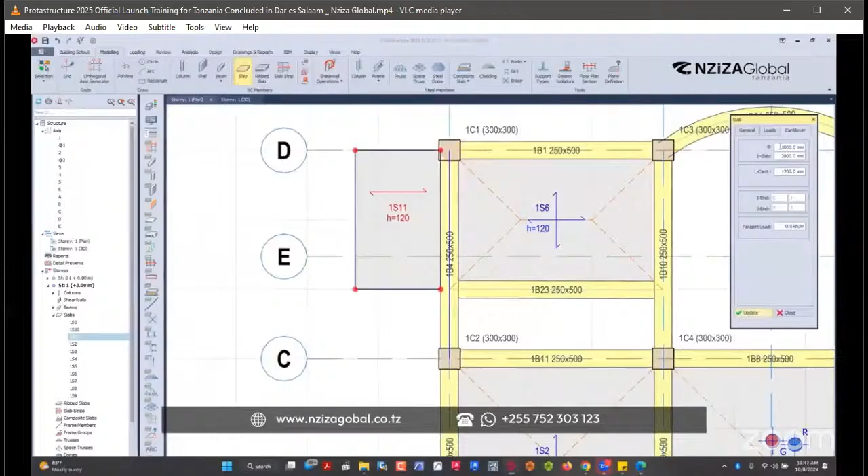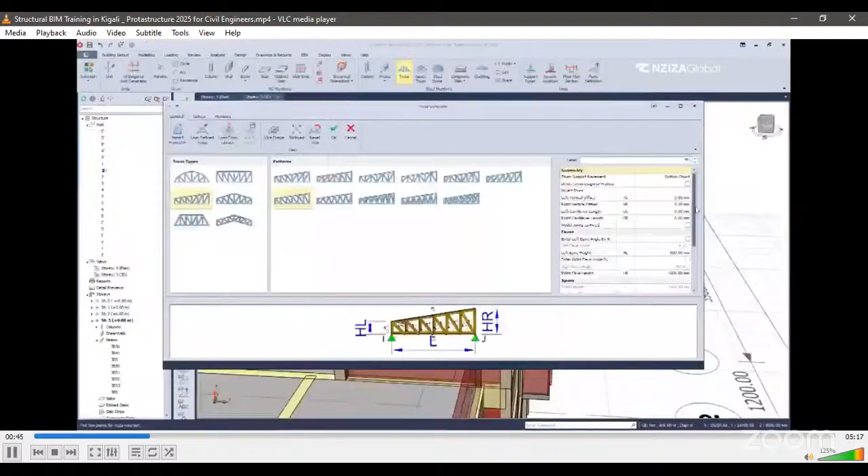Before, we were using manual skills for designing and also other softwares like Prokon, but this one, ProtaStructure, is a very interesting software for structure modeling analysis. It is quick regarding the design of structures, for concrete structures, steel structures. It is very quick. It is detailing everything and it can be used by most of the engineers.

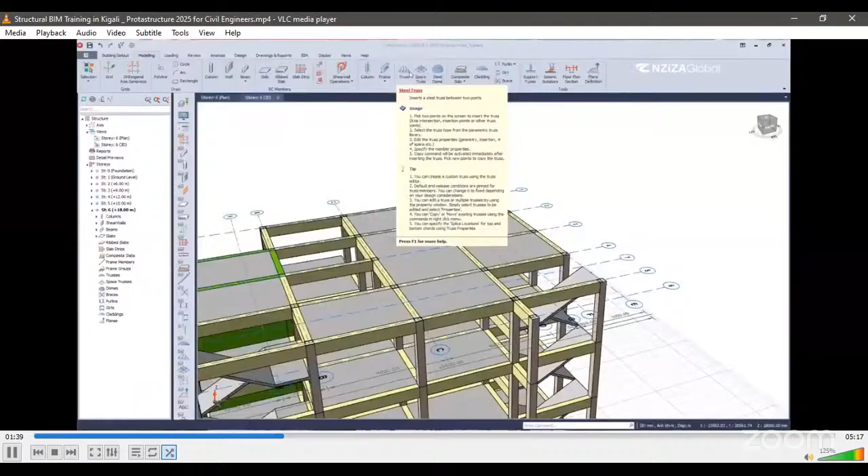I work in a public institution called Rwanda Agriculture and Animal Resources Development Board in its single project implementation unit, SPIU. I was one of the civil engineers attending the training on ProtaStructure software, and I found it very fruitful, especially for civil engineers, where we learn more on the design of building structures,

and also this is a good training center, and we recommend to expand this training for both the public and the private engineers to improve the capacity on using softwares, as these softwares help to perform our work rapidly in safe design.

I have attended the training of ProtaStructure 2025. The training was very, very interesting because by attending the training, I was able to conduct model analysis and model detailing in ProtaStructure 2025. I was able to conduct the exercise of modeling, loading, and structure analysis, even detailing, by using both Prota details and AutoCAD.

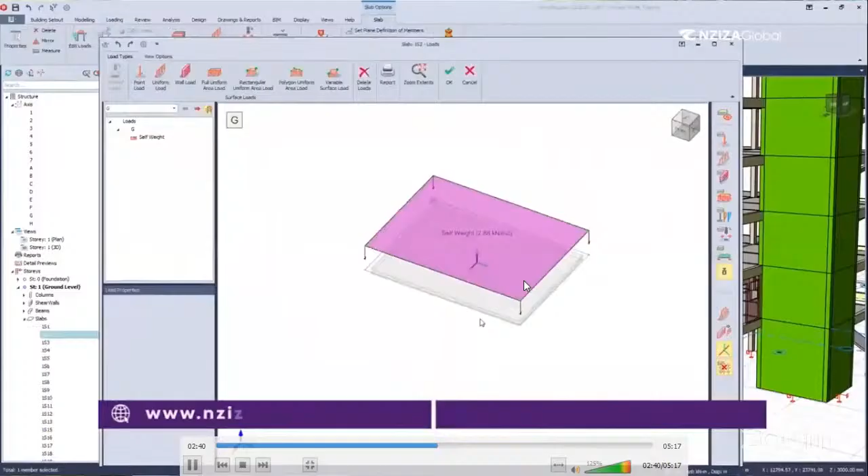After this training, I will be able now to use the software and even cross-check the report provided by the external consultant and validate it in a short time, and also cross-check what has been done. So the recommendation to my institution or the other agencies or other companies, I can encourage them to

I'm a quantity surveyor from Suma JKT Construction Company. Nziza Global enhanced the training and it was so useful. We got the necessary tools to use PlanSwift software. It's a good software to build bills of quantities.

I work for the Road Development Agency, which is a road authority in charge of planning, design and maintenance of the road network in our country, Zambia. I'd like to thank Nziza Global for inviting our agency, and I'm honored to have been nominated by our agency to come and participate in this important training.

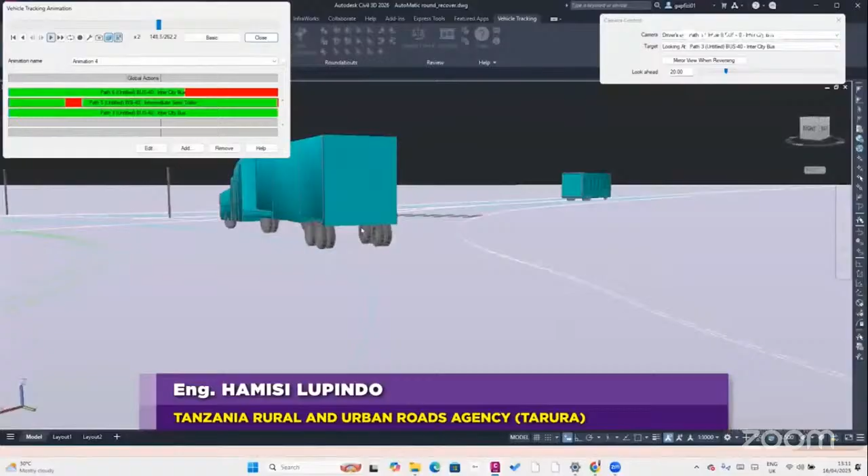I work from TARURA, Tanzania Rural and Urban Roads Agency. It deals with planning, managing and construction of different roads in Tanzania, rural and urban sections. This is my second time to attend a training from Nziza Global. I would like to thank Nziza Global for facilitation of this course, where our facilitator has equipped us with knowledge about road design, advanced design of roundabouts, and vehicle tracking, which will assist us in our daily activities.

I'm a quantity surveyor from Suma JKT Construction Company. Nziza Global enhanced the training and it was so useful. We got the necessary tools to use PlanSwift software. It's a good software to build bills of quantities.

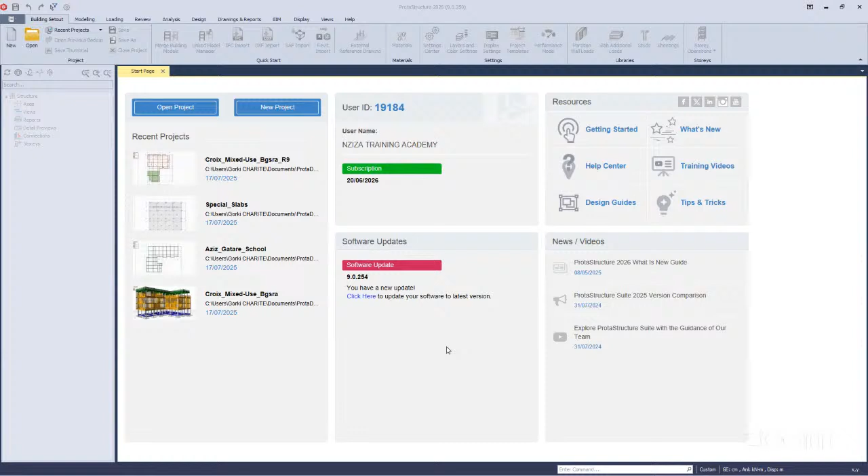So from the information I got from the form you filled when registering for the webinar, I saw that most of you are familiar with ProtaStructure and just a few of you are beginners to the software. So during this webinar, I will try to demonstrate some of the features of the software, but our main focus will remain on the design of ribbed and waffle slabs. So without taking much time, let's start the demonstration.

So this is the starting page of the software. You already know the starting page. What I will do, I will create a new project. You can create a new project or open an existing one. Give it a name, let's say training webinar, for instance. And then here you have to choose the standard that you want to use. Let's use the British standard. Then click on OK. So the software will load a bit and open a new project. Good. So this is our new project created.

In ProtaStructure, you know, we have a very user-friendly interface here at the top. You can go to the building setout for certain settings. You can go to the modeling to create different building elements like columns, beams, and whatever.

And if you check well, in this latest version, we have a newly introduced tool, the staircase. As you know, in the previous version, we used the plane definition to create those kinds of elements. But here in the new version, we have introduced the staircase tool, which is very, very good. When it comes to steel, we have also introduced the base plate tools here. Now you can create the base plate in ProtaStructure without going to ProtaSteel. All these are new features of the new version.

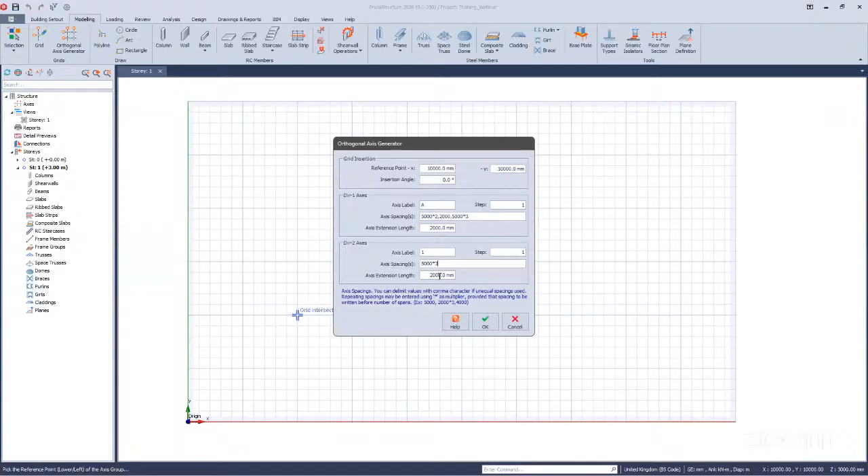So let me start by creating some grids. As you know, before starting modeling, you have to create grids. What I'm doing, I'm filling the spacing between grids. So we have two directions: direction 1, which is X, and direction 2, which is always the Y-axis. So these are just spacings between grids that I'm filling here on direction 1 and on direction 2 as well. If I click on OK, automatically I will have a grid system. This is the quickest way instead of drawing grids one by one manually.

Okay, so let's try to create some columns. I will use the column command. If you click on column, we have a property where you have to feed all the information of the columns. You have to check the section of the column, of course, and after this, you have to start placing columns. So just click on the intersection. The column will be created.

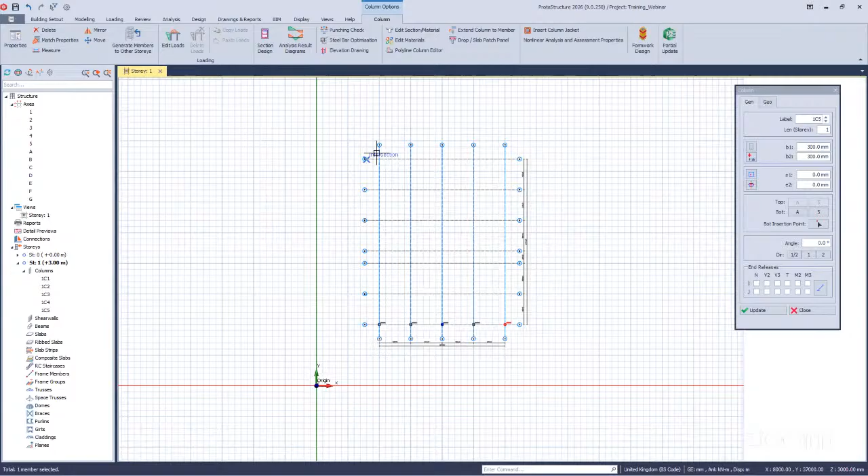So to facilitate the work, if I just drag and drop, all columns will be placed. So if I click and drag, the columns will be filled. This is the easiest way of placing columns instead of placing them one by one. So you see, in a few seconds, I have modeled the columns. You can play with the eccentricity if you want. You can change the bottom side if you want to create a slant column. You can change the angle and so on.

So let's also put beams. I will go to the beam command. I will click on beam. Just fill the section of your beams as you wish. Put the width, put the height. If you want to use the eccentricity, you can. You see you have eccentricity as well. You can create a curved beam in ProtaStructure and so on. Most of you, I saw, are already familiar with this, so I will not spend much time here.

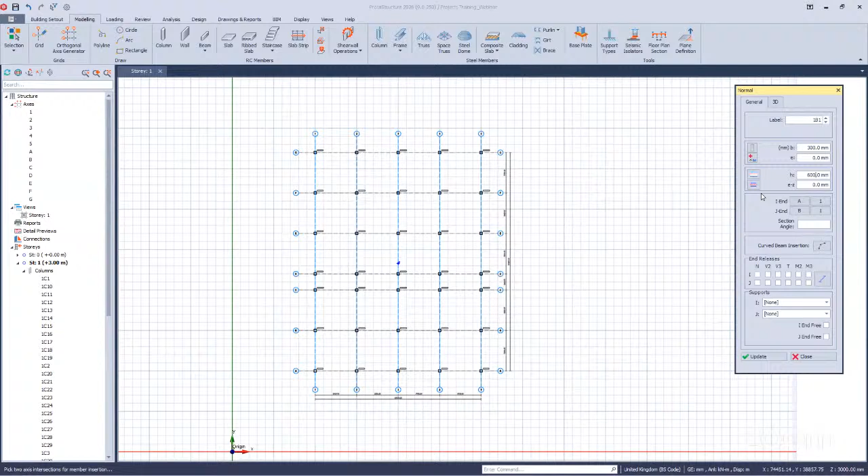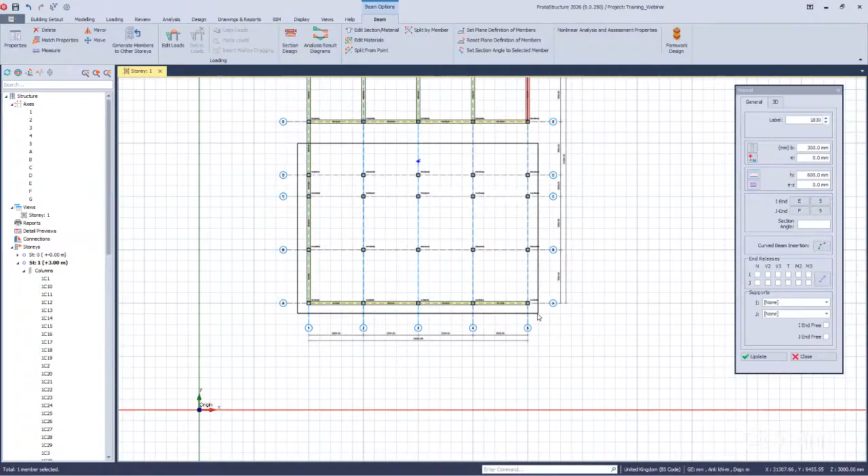Again, to place a beam, just click the starting point and the end point, then the beam will be created. You can continue placing your beams like this, or you can just click the starting point, click the last point here, and the software will automatically know that we have some columns in the middle and create different spans of a continuous beam. Like we did with the columns, you can just drag and drop like this, and now all your beams will be created as simple as that.

So very simple, very quick to model in ProtaStructure. So far, we can view what we have done in a 3D view. So if I go to the view here, I can now move to the 3D physical model to see what I have modeled so far. So you can see our first story has been modeled with columns and beams in just a few minutes.

Okay. So there are still options to make some changes to what you have modeled. For instance, if I want to put a slant beam, we can always open the properties, go to the 3D view here, and change this delta Z. Click on update. You see how I have created a slant beam, if I can say. Okay, you already know all these features, so I will not spend much on this.

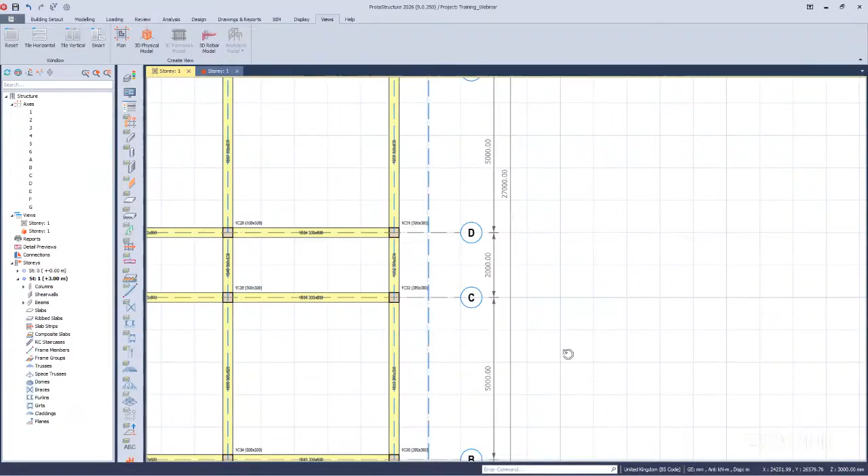Coming back to our floor plan. If you want, for instance, to create a slant column, let me offset this axis, let's say here. Let me open the 3D view for you to see the effect. For instance, if I'm working on this column, I can change the bottom side here. I click on update. Now I will have a slant column like this. Okay, so that's how ProtaStructure is very easy to use when it comes to modeling.

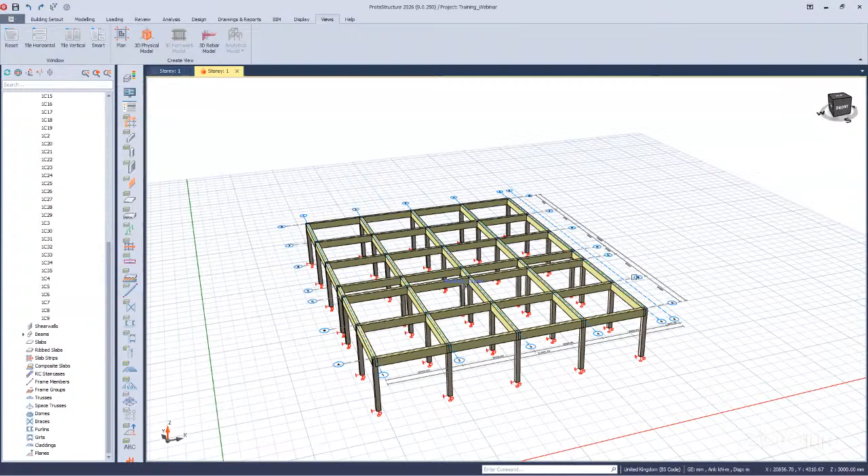So let's try to create the slabs. That's where we are mostly focusing. Let's start with the rib slab. I'm going to create a rib slab on this story. So for you to view it very well, I will go back to the plan view. So I will go back to the modeling tab. Remember, I want to model the rib slab. Let me tile my view so that you can see what I'm doing even in a 3D view like this.

So you are already familiar with the solid slab. If you want to create a solid slab, it's a matter of clicking on the command. You first have to create the load combinations. Then you have this pop-up. So if I close it and click again on the slab command, you can fill in the size of the slab and whatever, and just by clicking, you will have a normal solid slab. This is a solid slab that we are used to. But we are not much concerned with this solid slab, so I will delete it. It was just a way of reminding you how things are done. Today, we are much more interested in the rib slab as well as the waffle slab.

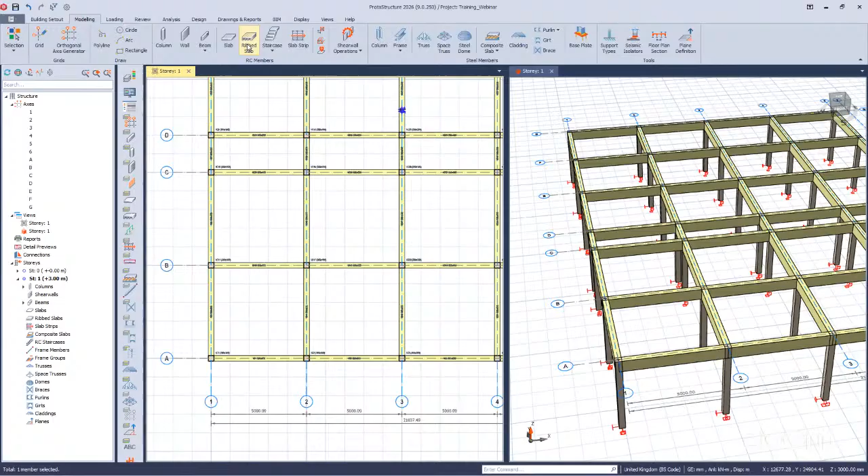So as you know, the rib slab is located here under the modeling tab, all the way to the reinforced concrete members here. We have the rib slab. So I'm going to select the rib slab. As usual, you will have this dialog box for the rib slab. So as you know, rib slabs are composed of small parallel beams, what we call ribs. So for instance, if you create a rib slab here, it will be composed of small parallel beams or ribs, with a small topping slab at the top. So let's see how you can do that.

After activating the rib slab here, you see under the type we have 3 different types. We have the standard one, which will be used to create a rib slab, like we are going to do in a few minutes. Then the prefabricated slab, when you are dealing with prefabricated slabs; we are not covering this in this webinar. And we'll be using grid edge when you want to model the waffle slab. So you already know the difference between the rib slab and the waffle slab. The rib slab has those parallel beams, but the waffle slab, which is named grid edge in ProtaStructure, has cross beams. So we have beams in both directions, X and Y, while in the standard one, the rib slab, we have beams in only one direction.

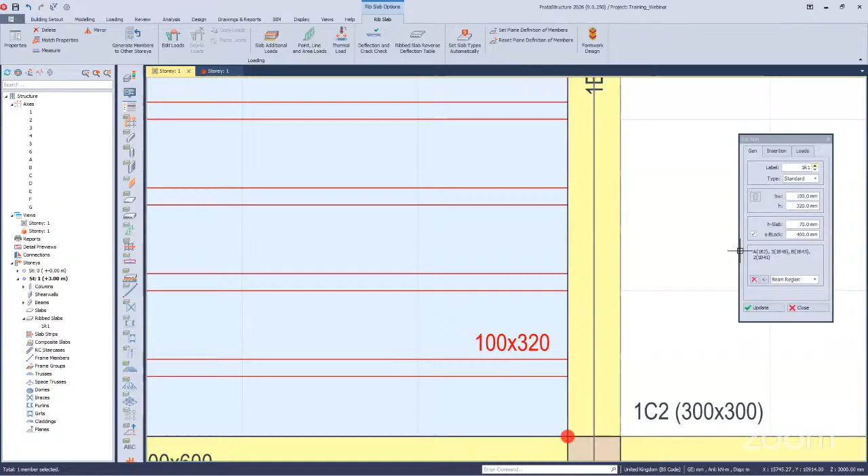Okay. So now I have a rib slab. A rib slab means we have different ribs here, or beams, these small beams, which have the size that we filled in. The BW was 100 here. The H, the height or the depth, was 320. And the top, the surfacing concrete covering all the beams here, will have around 70 millimeters.

So the 400 that we filled in here is the spacing between these beams, okay? For instance, if I increase it, let's put 600 and click on update, you see now how this distance has increased. If I go back and put 400, update, you see how they have been reduced. So that's how you can place a rib slab.

However, remember, between these small beams, most of the time we have those hollow blocks that are filled in between here on the construction site. You already know how these are constructed. So in ProtaStructure, we have this option, S block. We have this tick here. If you uncheck this, you will have hollows in between. But if you check this one, you will have blocks filling this spacing here.

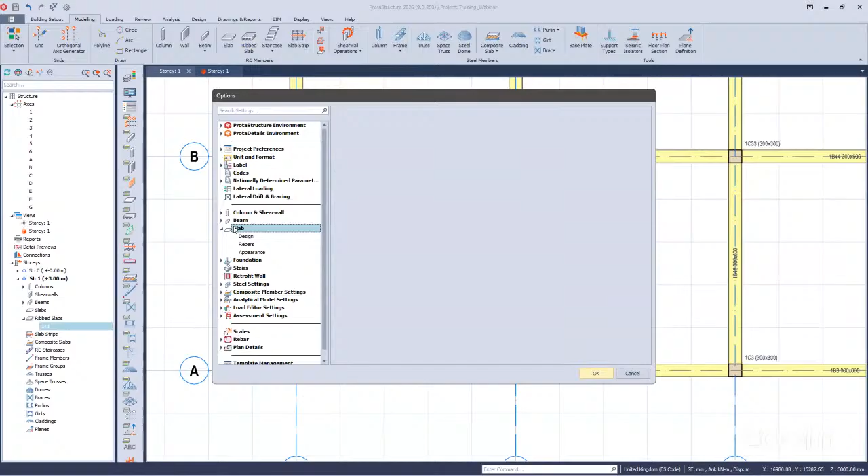And you can ask yourself, where does the unit weight of these blocks come from? If I go to the settings, all the way to the slab, let me check. Under design, you see the ribbed slab fill block. We have the unit weight here. This is the unit weight the software is using. Depending on the blocks used on the construction site, it's a matter of just changing this unit weight, and the software will calculate the self-weight automatically for you.

As simple as that. So in addition to the self-weight, you can add the additional dead load here. You can add the imposed load, snow load, and other loads that you may wish. Okay.

Then I will close this. So that's how, simply, you can model your ribbed slab. So if you want to put the ribbed slab in all the remaining panels, you have two options. You can just select the property of this first modeled slab, and you can continue placing ribs one by one.

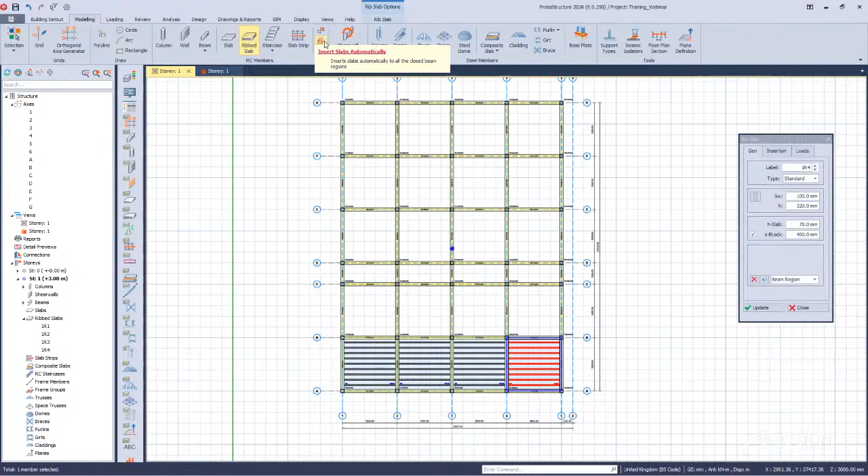But remember, in ProtaStructure, we always have an easier way of doing things. So instead of clicking on each and every panel, I can make sure that I have all the settings as I wish here. And if you go to modeling, under reinforced concrete members, we have insert slab automatically. For those who have taken the level 1 training with Nziza, you already know these tools. So just by clicking on this, all the panels will be filled with your ribbed slab.

If I go to the 3D view, now I have something like this. Good, so that was it about the ribbed slab. Let's go on and try to model also the waffle slab for you to see. I'm going to create another floor, another story. So we'll be having the waffle slab on the top story.

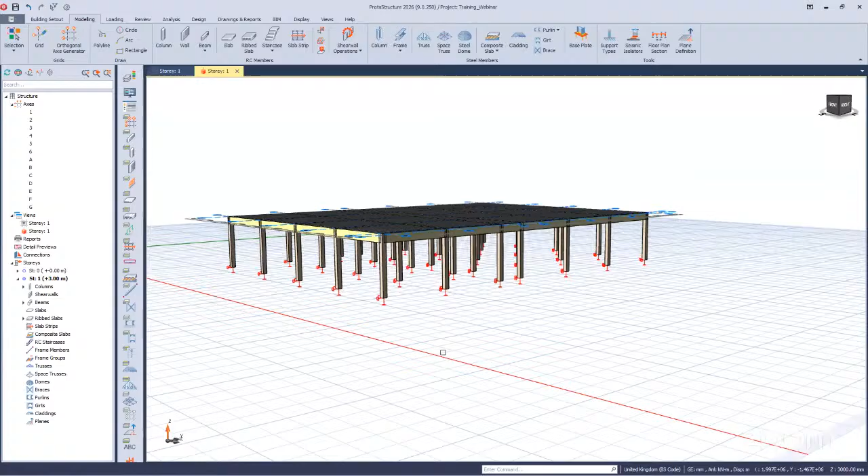So you already know how to create or insert a story. You have a couple of ways. It's up to you to use the one which is easier for you. You can go under the structure tree. If you click on story, right click, you have insert story. If you go to the building set out here, under the story operations, you also have an insert story. So it's up to you. I'm going to, let's say, 3. Now I will have 3 different stories. You can view it here. This is story 3, story 2, and now I have story 1.

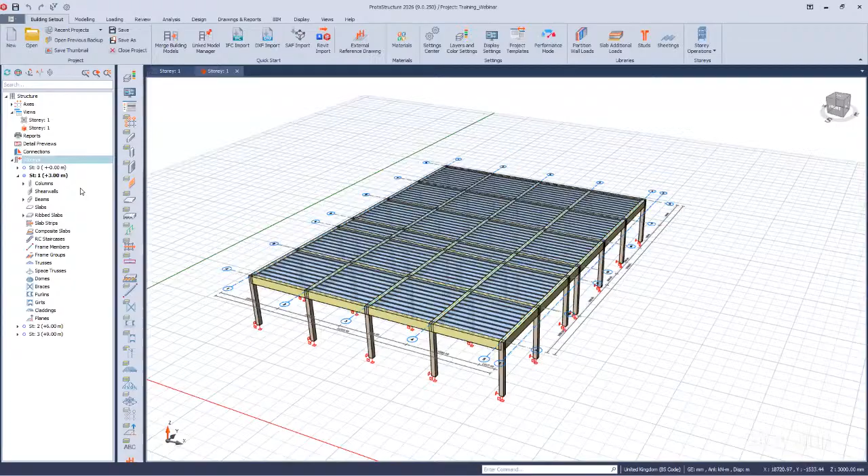So I'm going to move on my plan view. Or let me do it in a 3D view here so that you can see it. Instead of going to story 2 and creating everything from scratch, I'm going to copy paste the members from story 1 to story 2. So how will I do that? You already know the command. I will use generate story. I want to copy from story 1 all the way to story 2.

So which elements do you want to copy? I want to copy only columns and beams, because I don't want to copy the slab, because we want to create the waffle slab, not the ribbed slab, on this story. So I will click on OK. Just wait a few seconds until you see the process completed. Now you have another story populated as such. Now let me go back to the plan view and make sure I have activated story 2, where we don't have slab yet. And in this story, we are going to create the waffle slab.

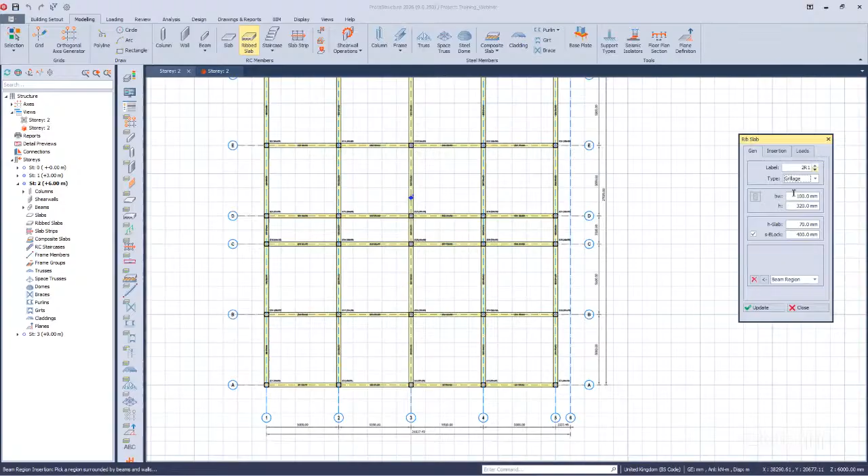So go back to the modeling. Under the ribbed slab, you remember the command. Then under the type, you remember the standard was the ribbed slab. Now we want to create the waffle slab, which is the grid one. So we shift to grillage. Now again, I will have to fill the information here as we did for the ribbed slab. After filling this information, I can come here and click once, and now I have the waffle slab. If you check well, now I have beams in both directions, in X direction and in Y direction. So that's the difference between the waffle slab and the ribbed slab.

If I go back to the ribbed slab, I had only beams in one direction. So it means when you are analyzing and designing the ribbed slab, it is taken as a one-way slab. However, if you go to where we modeled the waffle slab, we have these ribs in both directions, X and Y. So this kind of slab will be analyzed as a two-way slab.

So again, you can open the property and try to play with these parameters. If I increase the spacing and click on update, now you see the spacing has been increased. The insertion is the same as we did for the ribbed slab. The loads also are similar. Again, you can place one by one by clicking on each and every panel, or you can opt to use the automated way by going to modeling and activating insert slab automatically. Then all the panels will be filled with your waffle slab.

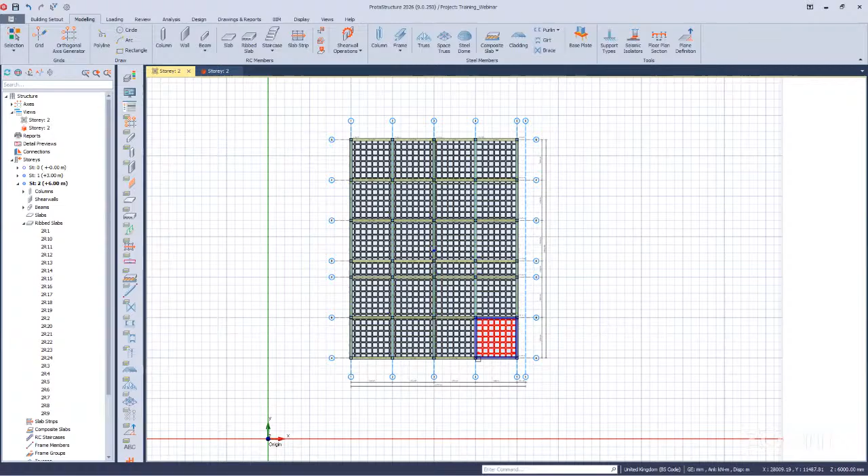And if you check well, you will see that ProtaStructure is kind of intelligent enough to try to align those rib beams, so that they may be well aligned. So if I go back to the 3D view, that's what we have done so far. We have modeled our rib slab, we have modeled our waffle slab. So now we can go on and see how we can do the analysis and design of this slab.

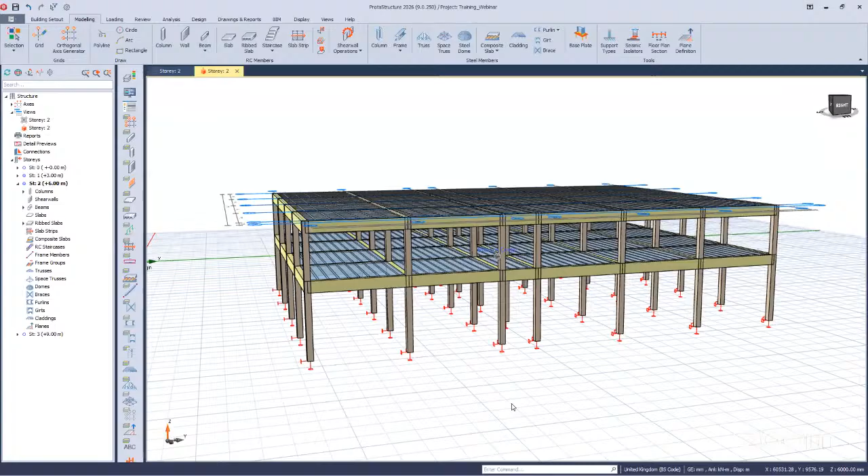But for your information, you already know that ProtaStructure can also design a flat slab. It is another kind of slab. So actually, Prota can design all those four kinds of slab. It can do the solid slab, the waffle slab, rib slab, as well as the flat slab. So even though we will not go into the design of the flat slab, let's see how we can just model the flat slab as well.

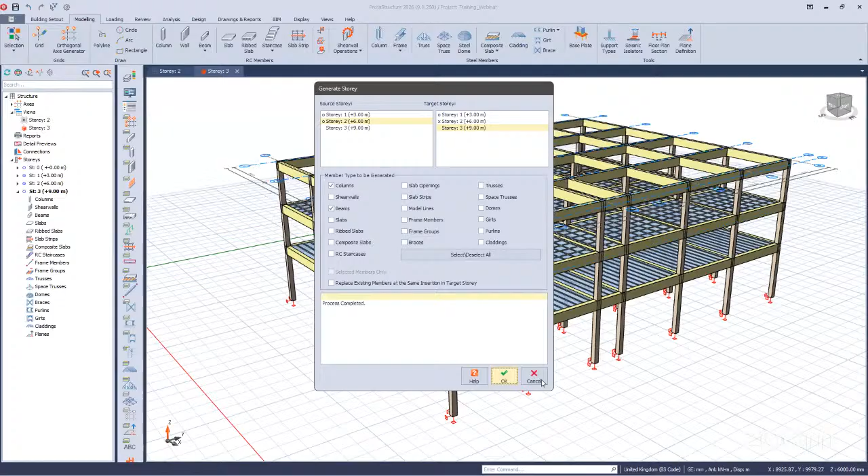So in this scenario, I will go and generate the story again. This time I will go to story 3. I will copy the column and beam only, so that we have something like this. So if I go back to the plan view, by the way, you already know that it is not necessary to always model in plan view. You can also do it in a 3D view here. So it is also feasible.

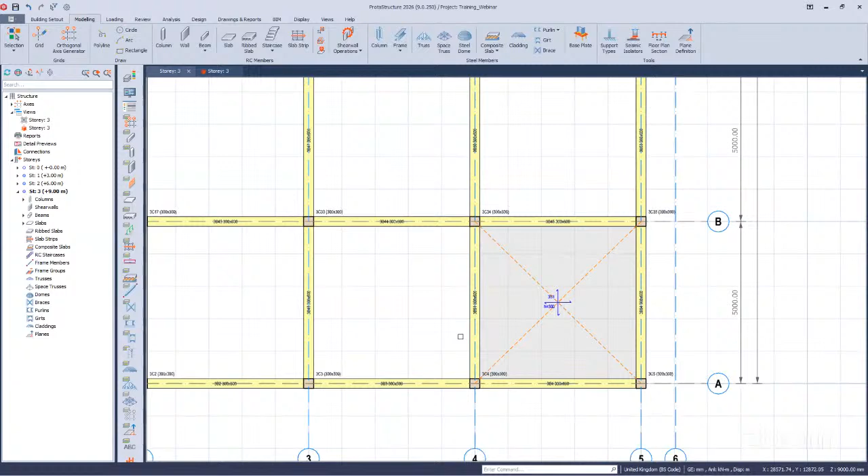For instance, if I want to create a slab, you can just click here. You can see the slab has been modeled just in a 3D view. So if I go to the plan view on story 3, you see the slab is there. So it's up to you. You can model in 3D view or in plan view. So I'm going to fill all these panels with slabs here.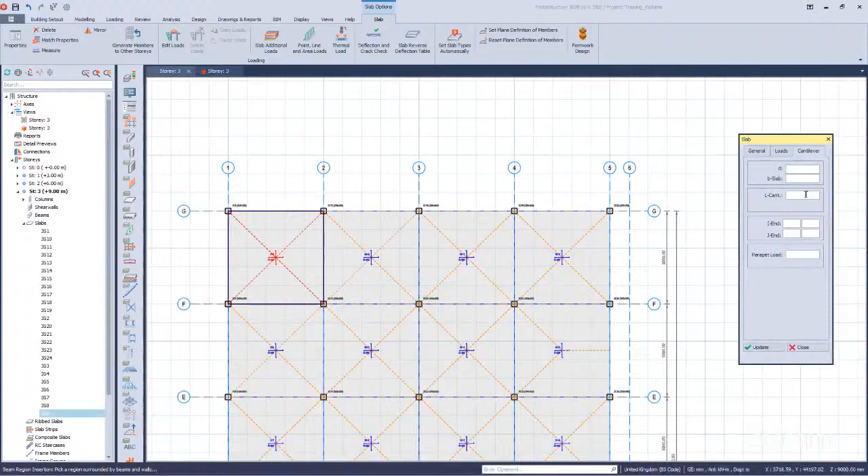I can even add a kind of cantilever slab here to cover this column if I wish to. If I go back here, I can use type 12. Type 12 is the one used for cantilevers. And if I go to cantilevers, I can fill in the length of the cantilever, like so. Now I have a cantilever here. I can do this all the way around the surrounding of my building. And take a look here: ProtaStructure has automatically joined both cantilevers. If I select here, automatically they are joined.

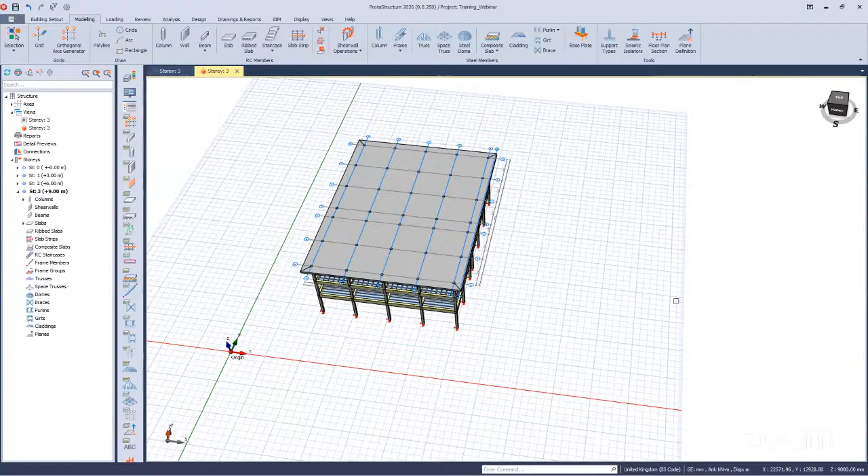So that's how you can model a flat slab if you wish. And if I go to 3D view, now I have a flat slab on the last story. So that's it with the modeling. I see we still have some minutes, so let's go for the analysis and the design of these kinds of slabs.

So as you know, when you are done with the modeling, I always advise you to check if there are some kind of errors in the modeling before you go to the analysis. So we are done with the modeling. The next one is the loading, of course. You should have loaded all the slabs. For instance, if I select one of these and go to properties, you remember we saw the loading tab. You have to fill in this loading tab here. So after the loading, you have to review the model to make sure that there is no error before you go to the analysis. The first thing to do is to check the building model check.

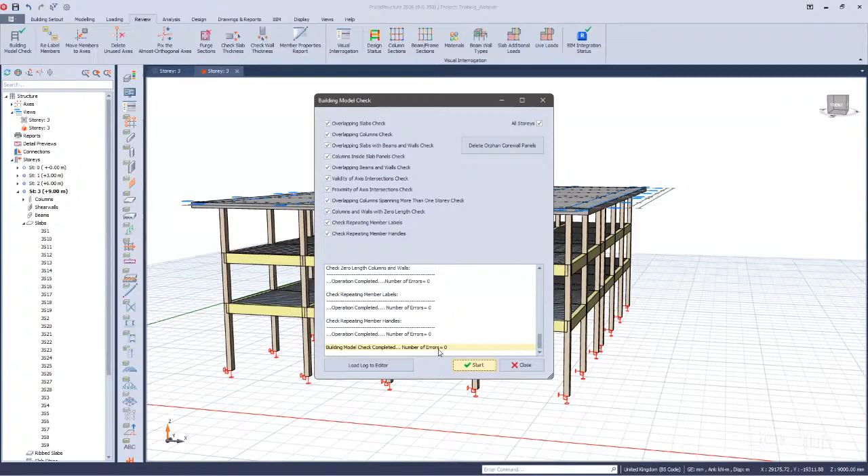Make sure everything is selected here so that the software can check all these kinds of overlapping and errors, and click on start. The software will automatically run and check if there is any modeling error. For my model, there is no error. You can see the last message: building model check completed, number of errors 0. In a scenario where I have an error, it will be listed here. So if there is no modeling error, I'm okay to go.

We have other review tools here. I advise you to go through all of these before going to the analysis. It is the best way of doing things, because as long as you have a modeling error, you will automatically have errors in analysis and design. So it's better to start by resolving these kinds of errors before moving forward to the analysis.

So let me jump straight to the analysis tab. Now we are going to do the analysis. As you know, we have a couple of analysis types in ProtaStructure. They are here: the building analysis, the floor analysis when it comes to foundation or finite element analysis. We also have load decomposition by finite elements. For the purpose of this webinar, let me move forward with the building analysis.

If you open the building analysis, of course, you have to go through all these settings and do them appropriately before running the analysis. Starting with edit material, you can choose the compressive strength of your members. You can choose the grade of your steel reinforcement. If you go to edit, you can check the rebar diameters that you want to use according to the member you will be dealing with.

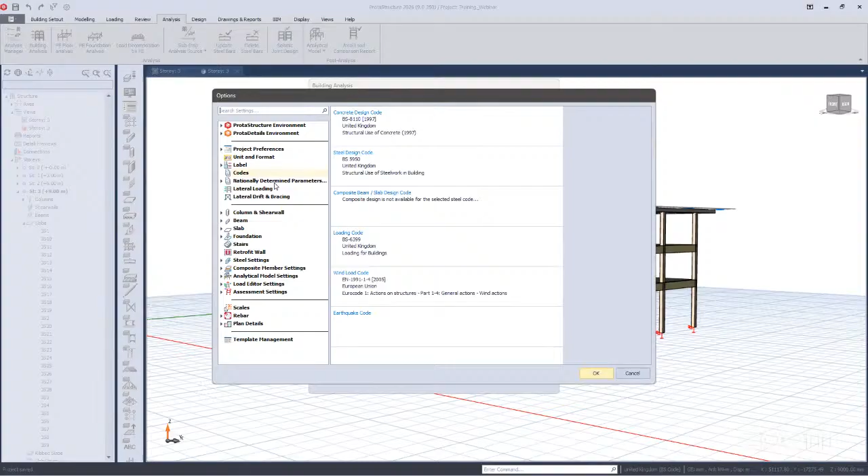These diameters, of course, must fit your local market. If your project is located in a country where you don't have, for instance, the bar diameter of 13, no need to use this 13 because it will not be available on the market. So be wise in choosing your rebar diameter here. If everything is okay here, you can go on with the settings. If there are some settings you want to check before you go to the analysis, this is the right time to do so. It may be the analysis settings, the design settings, and so on.

The load combinations: you have to set the load combinations. ProtaStructure provides the load generator to help you generate the load cases. We have vertical load combinations and horizontal load combinations. Depending on the analysis that you want to carry out and the load cases, you will set them appropriately. The next one is the model options.

Under model options, you have to go through all these kinds of settings: set the story degree of freedom, soil structure interaction. If you have shear walls, you have to define the model that will be used. Is it a mid-pier or is it a finite element shell? I recommend using the finite element shell. It is more accurate. You have the slab model settings.

Those who have covered our level 1 training already know all these kinds of settings. That's why we are not covering this much. For those who are new to Prota, you are always welcome to join our trainings. We talk about all these kinds of settings so that you know what you are doing when it comes to the analysis.

Here is a very important tab, the slab model, because we are dealing with slabs in this webinar. Under the slab model, I'm going to use the finite element mesh, because there are different ways of distributing load in ProtaStructure. It may be the normal yield line method, where we are using moment coefficients, or you may use the finite element. For this, I'm going to use the finite element.

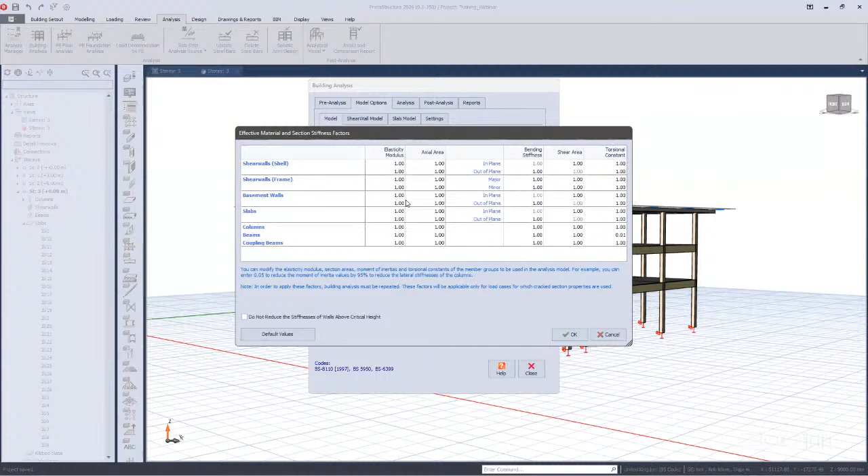So that's it. We have also other settings related to the analysis here. Okay. So after setting all this, now it's time to go to the analysis and run the building analysis. You can start by running the building model check, but you remember you have already done this. So I'm jumping straight to the analysis.

Okay, so the software will perform the analysis for you. It's a matter of just waiting. So the bigger and more complex your project, the more time the analysis will take. It will also depend on the capacity, of course, of your computer. So if you have a very powerful computer, the analysis will be short. Okay. Now mine has been completed in 37 seconds.

Okay, and you can see here the building analysis has a green tick, so it means there is a successful analysis. If you go to the post analysis, you can display the analytical model if you want to view the bending moment, the shear force, how your structure is behaving. You can activate the diagrams to see the results. You can opt to view only one story, for instance.

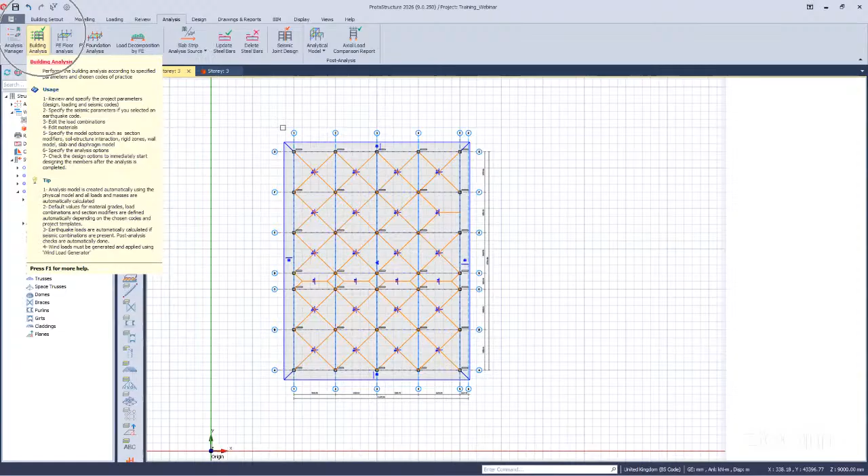Here on the left, you have different load combinations and load cases. So you can view them one by one as you wish. We are not going through the building analysis models much. Now, let's go for the design. If you check here on the building analysis, you have a green tick. The analysis has been completed. Now let's move on to the design.

Okay, so I will move to the design tab where we're going to design our slabs, starting with the rib slab. So how to do this? As you already know, to design the slab, we have to create what we call the slab strip. Those slab strips take the forces, the results from the analysis, then they will provide the reinforcement in the slabs. The slab strip tool is found in the modeling tab. If I go to the modeling tab, you will see slab strip. So activate it.

Under types, we have 3 different slab strips: the analytical one, the finite element strip, and the manual strip. For this kind of slab, we'll be using the finite element strip, because we have analyzed our slabs using the finite element analysis. So here you have to specify the analysis result source: is it from the building analysis or from the finite element floor analysis? We have performed the building analysis, so it will be from the building analysis. Then you have to draw your strip.

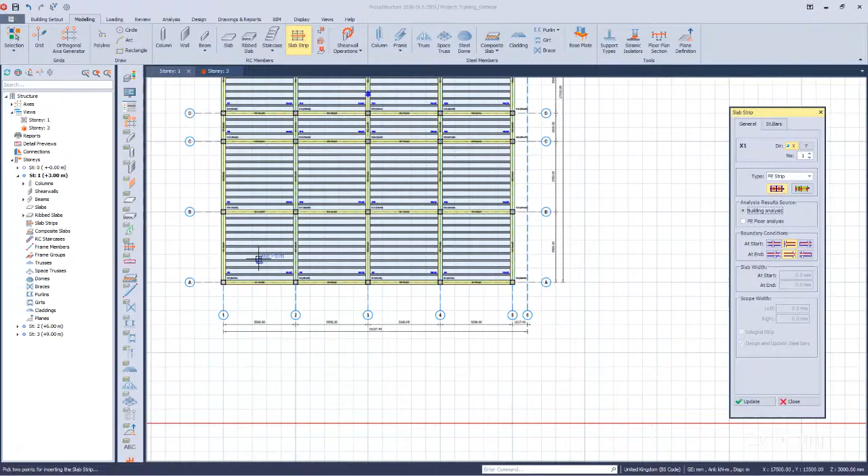Pay attention here. When you are designing the rib slab, the strip must be parallel to the rib, because we want reinforcement in these small beams. So I will create a strip here in X direction, like this. Okay. Now the strip has been created.

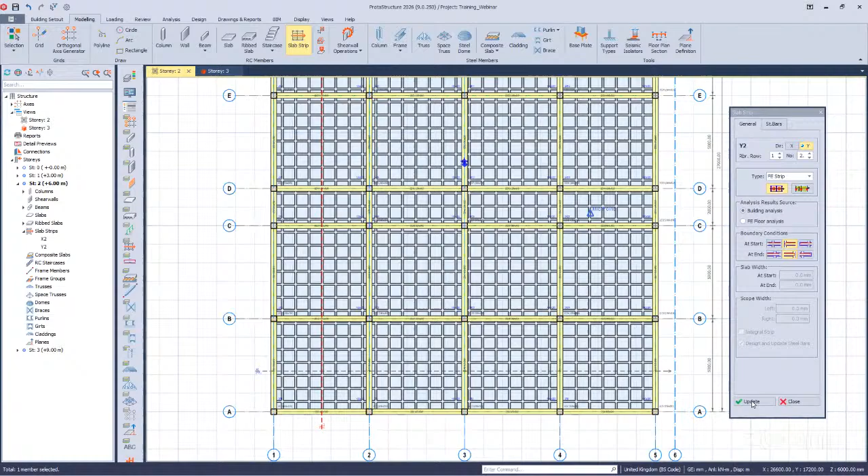But because of the limited time, I will just end here, so I will only put the two strips here. For story 3, we will not cover this, but again, if you are dealing with a flat slab, you can also use the finite strip. But in this scenario, you have to use the fixed band strip, this one.

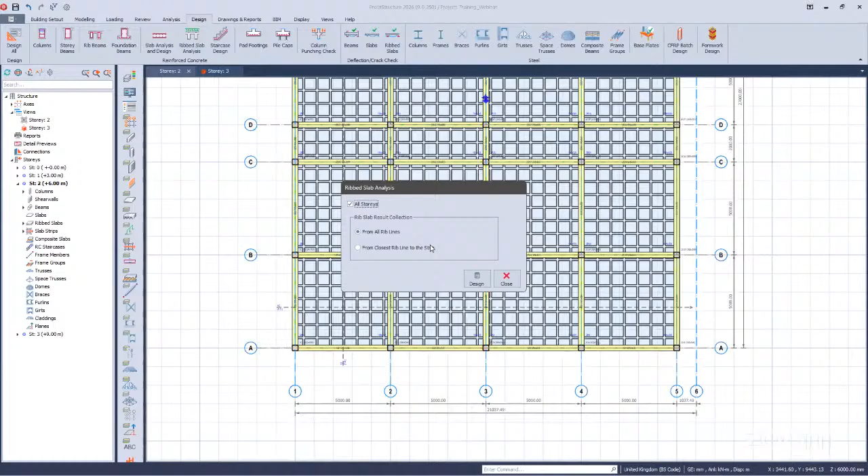Here we have two options: from all rib lines or from the closest rib line to the strip. Remember when we were creating the strip: depending on where it passes, it is close to this rib beam. If you select the second option, the design will consider the load captured by this rib beam. I don't recommend this, because you may have created the slab strip nearest to this rib beam, yet the rib beam with high forces is this one.

If you select from all rib lines, the software will analyze all the ribs and capture the result of the most loaded one. So I advise using this, then go to the design. Just wait a bit while it prepares the report of the rib slab analysis results.

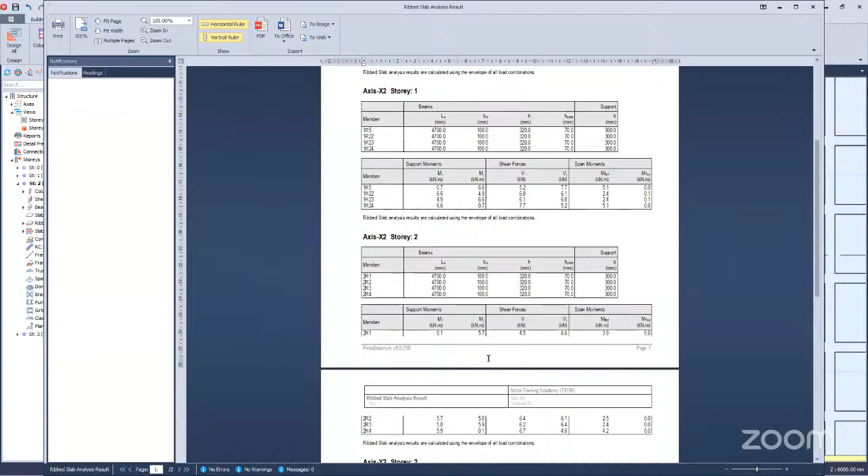You will have the report here. For instance, axis X1 on story 1, the first strip that we created, was passing through these ribs. These are the members. We have parameters here, and the shear force and span moment already calculated. It is done for all the strips we created. You can save this report as a PDF or Microsoft Office file.

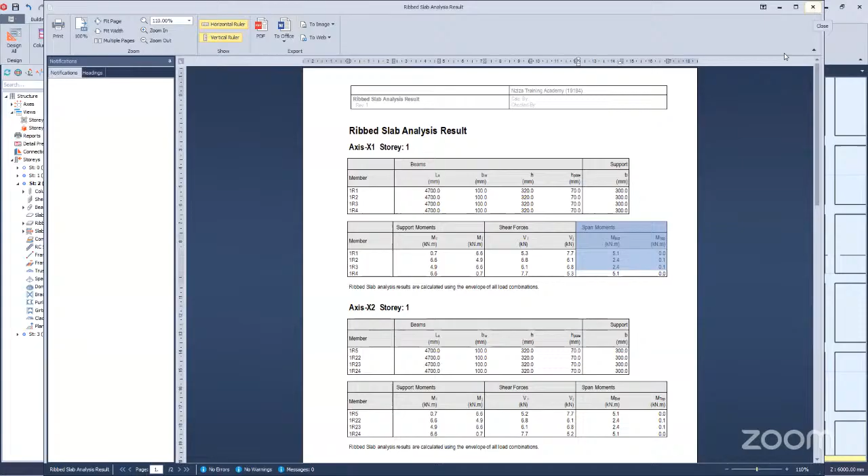I will close this, and close this again. Now we are done with the analysis of our ribbed slabs. Let's go on and design. When it comes to design, what are we designing? We are designing the rib beams. That's why under Design we locate the rib beams. We want to see the section and reinforcement adequate to carry the loads acting on the slab. So I will activate the rib beam.

We will have all the strips that we created. It's almost similar to how we normally design a beam. I'm going to select one of these and do the interactive design. When I open it, I get this warning: the design is not valid, do you want to update the rebars? If I click yes, the software automatically updates the rebars. If I click no, nothing happens and I have to design them manually one by one. So let me update this.

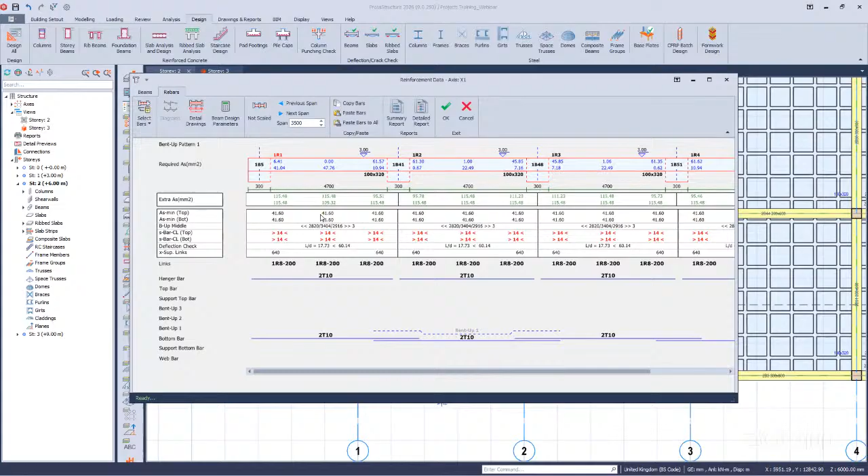After updating, you see reinforcement has been placed depending on the area required. You see the reinforcement here, and the links with their spacing as well. Let me go to the detailed drawings to show you how these are represented. This is the ribbed beam. This one is the section of the normal beam, the beam supporting the ribbed beam. This one.

Now you can see the section of our ribbed beam. You remember the size it had, 100 by 320. That was the height. Okay. But there is an issue here. If you check these stirrups, the way they are arranged, it is not correct.

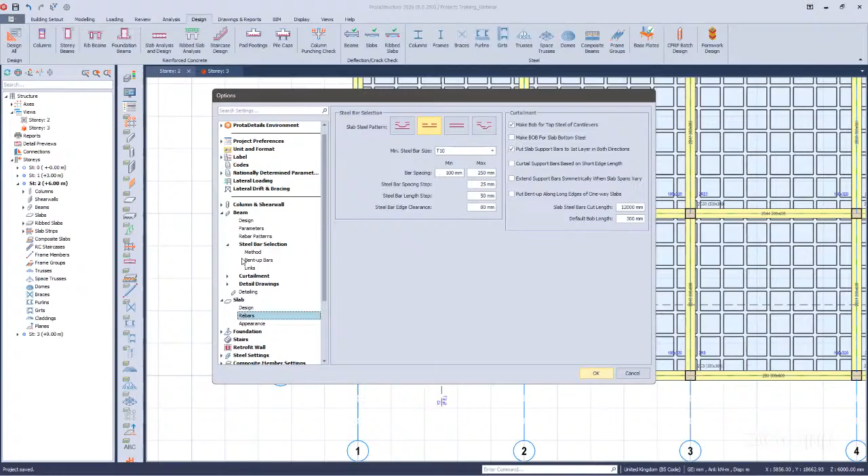So if you want to correct this, it's a matter of going to the settings. I will just temporarily accept and close this for now. If you go to the settings, under the slab rebar, okay. No, we are dealing with beams, so I will have to go to beams. The problem is with links, so I will go to the links. Okay, so you see the rib links.

So it has this kind of shape, this closed one. You can use the open one, but for our case, we want to use this one, the standard one. So if you change this and go back where we were, okay. Open the detailed drawing, you see now the issue has been resolved. Okay, so whenever you see something which is wrong with your drawings, it may be corrected under the settings.

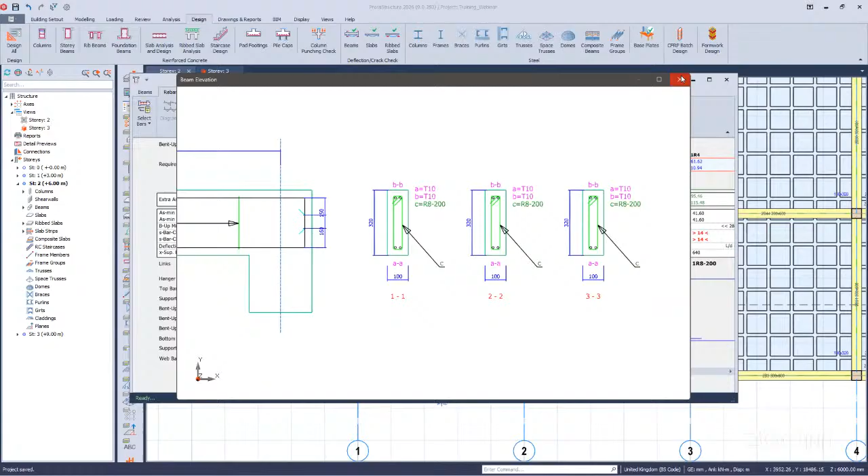That's why when we are delivering our training, we make sure that you understand all of these kinds of settings. Because they may differ depending on where you are located, depending on what you are used to doing on your construction site. So it's up to you as an engineer to customize the software to meet your market requirements.

So you can go on and design all the remaining beams one by one, but ProtaStructure always gives an easier way. We have what we call a batch mode design. If you use this, it will automatically design all the beams here at once. Okay, now they are here. So after the design is successful, you may go on and create reports here. You have different kinds of reports. You have summary report, you have a detailed report, and so on.

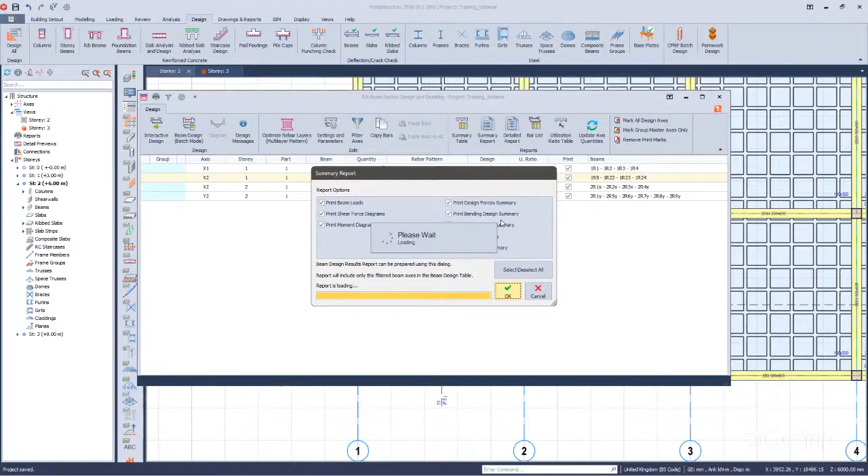So for instance, let me go with the summary report. If I click on it, it will just load and prepare the report for you. Just wait a bit, and we'll have a summary report of what you have done for the ribbed beam. You see the reinforcement that we had. Everything is passing. You can see the shear.

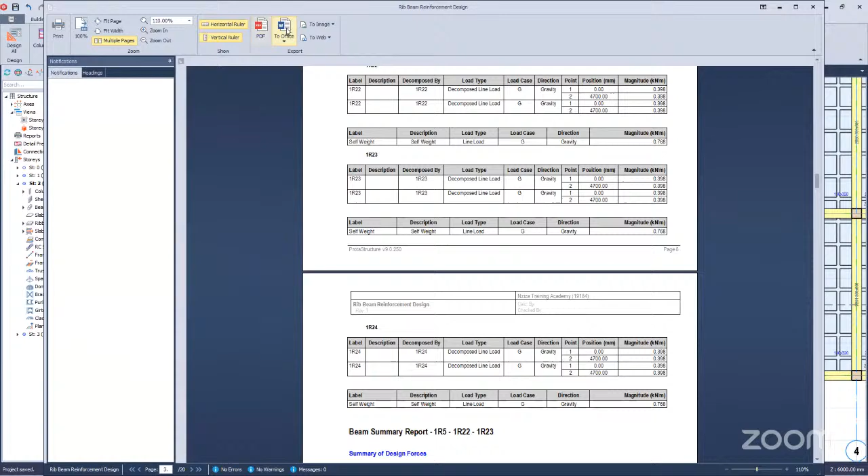Everything is okay. So again, after having this report, you can save it as a PDF document or save it as a Word document. Then I will close this. I will close this as well. Okay, so that's how you can deal with the design of waffle slab and rib slab in ProtaStructure.

For your information, if you want to do the detailing of these kinds of slabs, it is also available in Prota. If you go to the drawing and report, you can always send them to ProtaDetails, and you will automatically have the detailed drawing of your design. So we will cover all of this in the upcoming training.

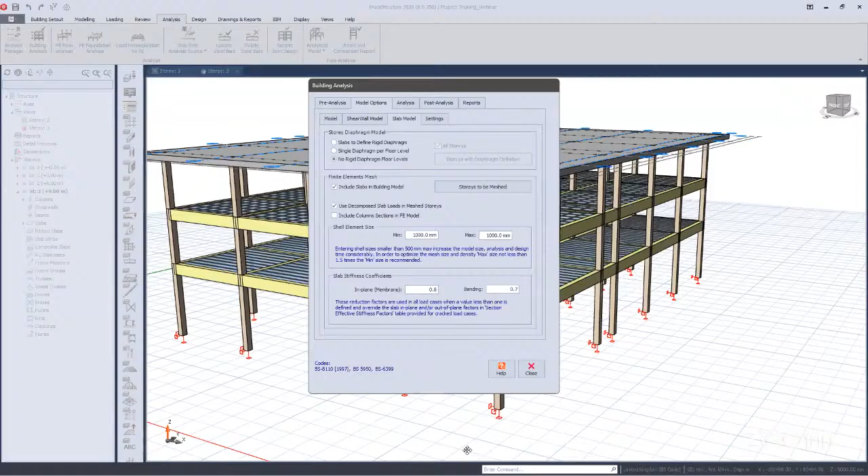So if you use this one, the software will isolate each and every floor and perform the FE floor analysis. That will be okay. But what I did, I also used the finite element analysis, but by meshing the floor with the building analysis. It's okay whether you are using this one or this one, it will be okay. Good. I hope I have answered your question.

So there is another question from someone, Lenovo. Okay. What influences the choice of slab type? Okay, so there are different scenarios or characteristics which can lead you to choose which kind of slab to be used.

But when talking about the ones that we have covered here, the waffle slab and the rib slab, these kinds of slab are used where we have very large spans. These are very useful where we have a very large span. For instance, the rib slab, the one we created at story one, can span from 6 meters up. The waffle slab can even span all the way to 12 meters.

So where you have a very long span, you can opt to use these kinds of slabs because they are lightweight when it comes to the self weight. Because they are just small beams and they have hollow blocks, they are lighter compared to the solid slab that we are used to. So you can choose to use this in those kinds of scenarios. However, there are other external features which can lead you to use this or not.

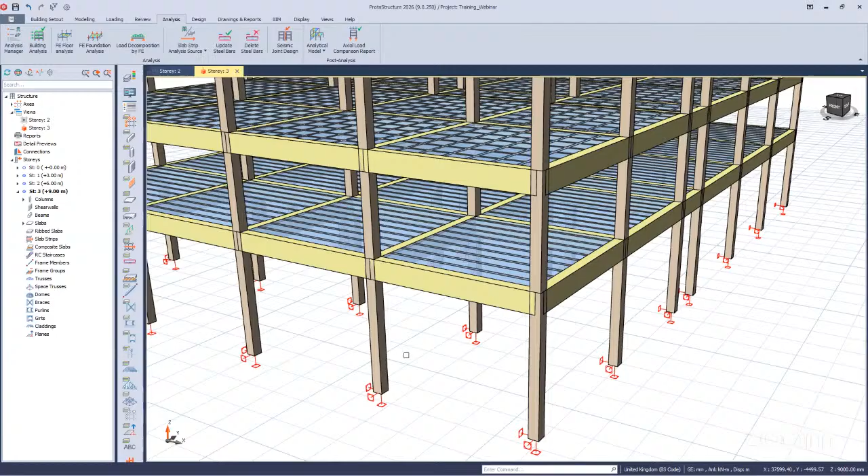You cannot decide to use a waffle slab maybe when you are in a country where you don't have manpower, you don't have technicians who know how to do such kind of construction. So we have different scenarios which can lead you to opt for this, but that's what I can say in brief. Let me see if there is another question.

Okay, so Sarah, you asked about the S block dimensions. So it depends on what is available on the market. Okay, so take a look here. If this is a rib beam, and this is another rib beam, the S block is in between here. So this will be affected by the S block that we'll be using on the construction site.

Sarah, I know you are from Rwanda and we have different types of those S blocks from Ruliba. So depending on the size we'll be using, you will come here and change this spacing. Because this spacing is the block dimension, it is the spacing between the ribbed beams. Okay, good. Mamo got it. Thank you.

Okay, so Eric, we have another question from Eric. When you go to the 3D view and display visual interrogation to see passing and failing members in color mode, the slab seems to be undesigned. Why? So for now, we are not covering the visual interrogation of this, but it will be included. Yeah, I know you cannot visualize this in color form. It will be added as well. Okay. There is another question.

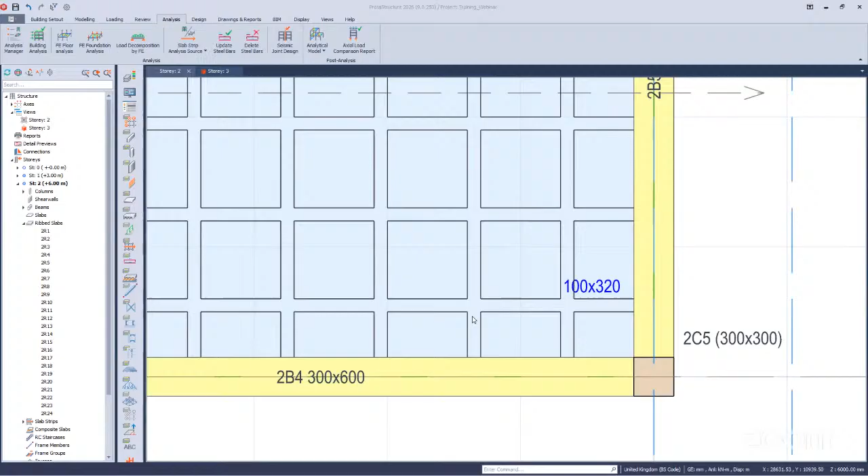So, Emmanuel, can you help me if there is any other question? Have you answered this question from Mwambwe? What are the disadvantages of waffle slabs? So when it comes to the disadvantages, I can say these waffle slabs are mainly meant to carry small loads. So if you have a scenario where you have a slab with heavy machines with vibrations and whatever, it is not recommended to use this.

This is the downside. So they are mainly used in scenarios where you don't have much load. If you have a scenario with higher loads, you always go with the solid slab. So that's a disadvantage of this kind of slab. But when it comes to cost, when it comes to reduction of the weight of the building, they are the best ones. So if you are in a position where you have moderate loading, going with this kind of slab, waffle or rib, will be better.

So, some clarification about dimensions. Yes, I was asking about S block center to center dimensions. Is that center to center or is it?

So we can try it. If you right click and go to measurement, see the measure, you can always measure from this one to this. You see, it is the edge of the block, if I can say. Are you able to see it? Yes, correct. Oh, okay, good.

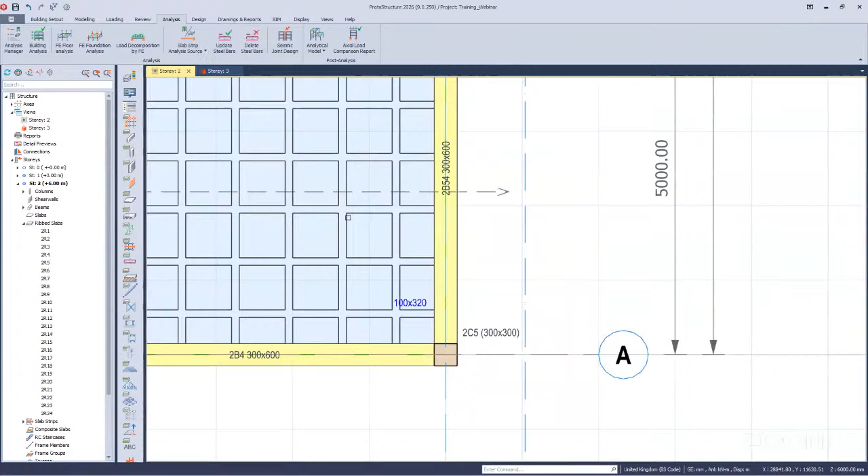So from the edge of the blocks, we have 800 millimeter, which is the one we filled when we were in the property. So it is not from center to center. All right. Okay, good.

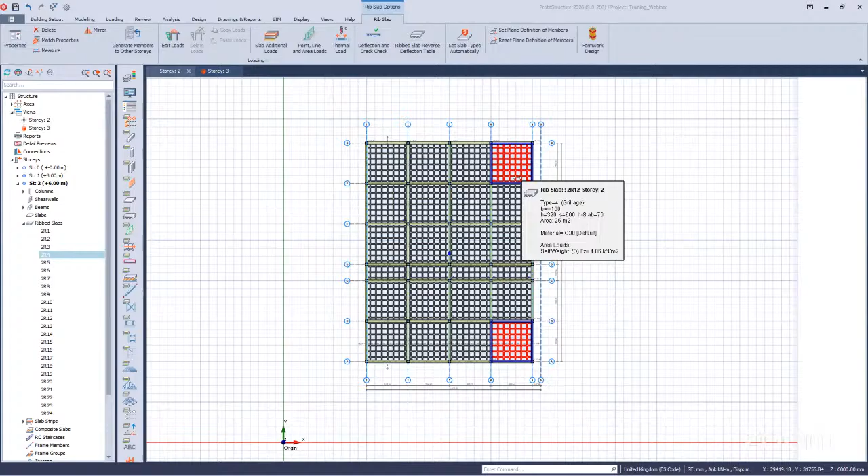So let me open the property. So you see the edge of the slab, okay? It is usually between 50 and 100 millimeter for the rib slab. It can go even to 150 for the waffle slab. So it is not designed. We only put that kind of mesh, the bottom reinforcement only, okay? But the loads are being distributed to the rib slab. So that's why the rib slabs are the ones to be designed.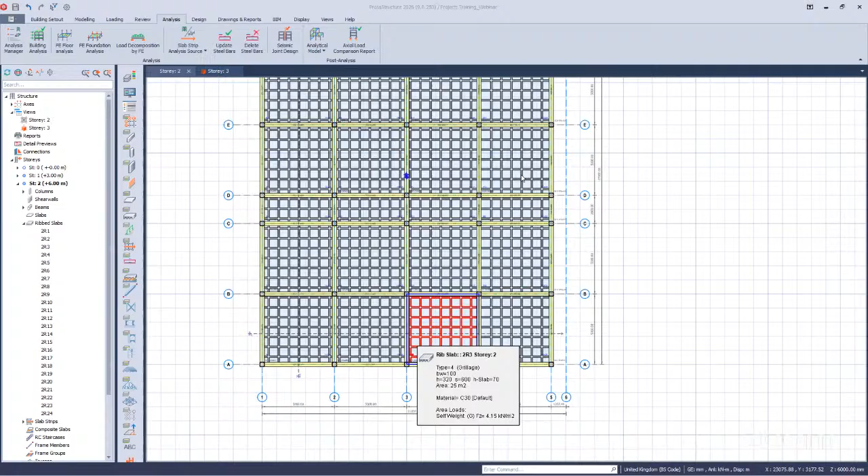Is there design for maximum deflection in waffle slabs? Sorry, can you come again? There's a question saying, is there design for maximum deflection in waffle slabs, just like normal RCC slabs? Not really, because on the normal slabs, we have a span, and we have a slab which is on top of the beams. So we have a gap in between, so it may tend to deflect.

Okay. However, in these waffle slabs there is no such kind of deflection because we have this kind of beams. It's a system of just beams. Okay. So we don't have those deflections that we have in a normal solid slab.

Yes. So engineer, let's take the last question from Lenovo once again. So do these slabs include both blocks and slab covering? Let me check the question. I'm not getting your question well, but if you mean that both ribbed slabs have this block and hollow block, yes, if you are designing the waffle slab, you can opt to go with the hollow blocks or the filled ones.

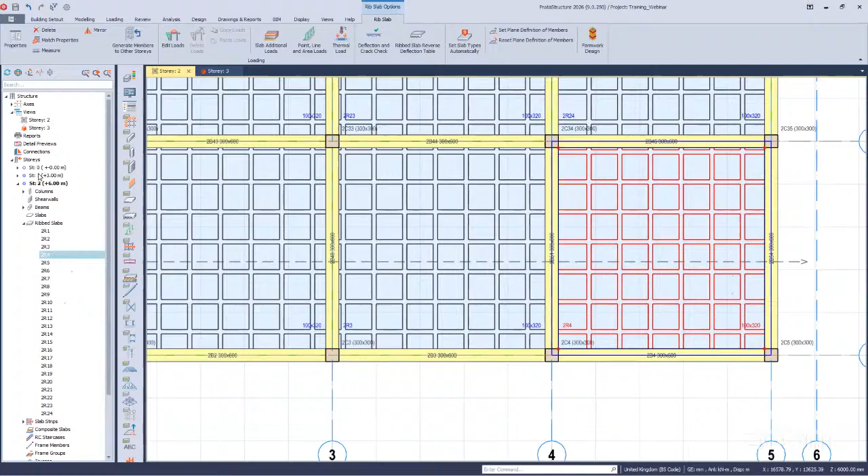The same goes when you are dealing with the ribbed slab, the one we created on storey one. It also has this kind of option. Okay, and what I can add, this is one of the topics which will be covered in the upcoming training. Here it was just a demonstration. We didn't cover them deeply.

So we'll cover the topic deeply in the upcoming training, and we'll have also other advanced topics. We'll be seeing how to design mat foundations, how to design the flat slab. You remember we modeled only the flat slab here, but we didn't cover how to design the flat slab, how to check the punching shear, the columns, everything.